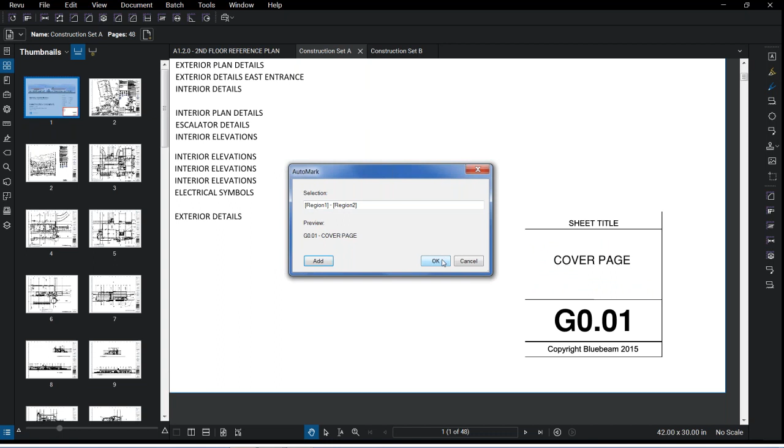Well, with Auto Mark, you'll see Create Page Labels up here. This allows me to essentially just tell Revu what information to look for when naming these sheets, when pulling up my smart labels. So I'm going to grab a page region, and I'm going to add my sheet title in with it, so I want my sheet name as well as my sheet number. I'll give it a little bit of space so I make sure I grab all of these, and then I'll just hit OK.

Now you can have it go through the entire page, the entire document, or you can specify if you want to set it to a certain number. You'll notice that it went through and pulled all of that information within seconds.

So one of the things I've heard about this is, what if I get sheets that are different, like title blocks, and there may be different sizes? That's where we essentially specify what page range. You can go through, hold down Control, select these different sheets, and run your page label there. Run your page labels for the next ones, and keep going. It helps us keep this nice, quick workflow.

So I've got this document all put together for those auto marks, but still, navigating through this document is kind of a pain. It's cool, I can click through my thumbnails, but if I need to see my detail like this one here, I would essentially need to figure out which one was 8.14. So scroll down, find my 8.14 in here, and then click on that. That's cool, but sometimes it honestly takes too much time.

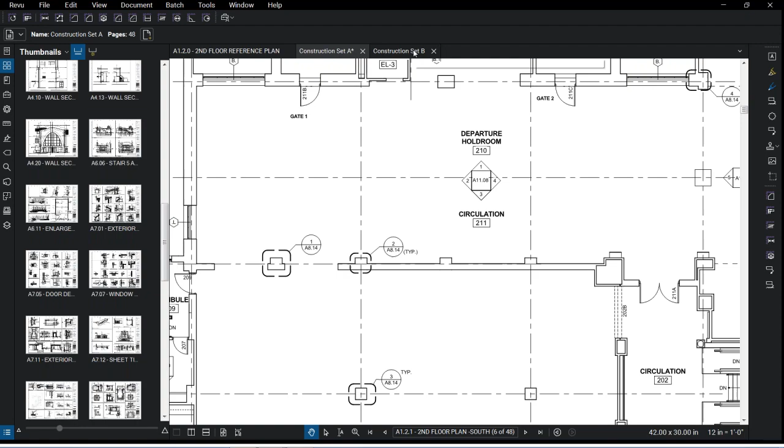So you'll see here I have a Construction Set B. This one is all tied together with what are called hyperlinks. What these hyperlinks are going to do is allow me to navigate through my sheet set easily. So I'll see this detail for my door here, and bam, I'm right in it. So why don't we go ahead and run that here?

Now, I'm going to let you know this feature is an Extreme-only feature, but this is the Batch Link feature. Now, take note here that it says new and open. When I go to create this new, I'm going to add my open files here, and I'll uncheck my first document there.

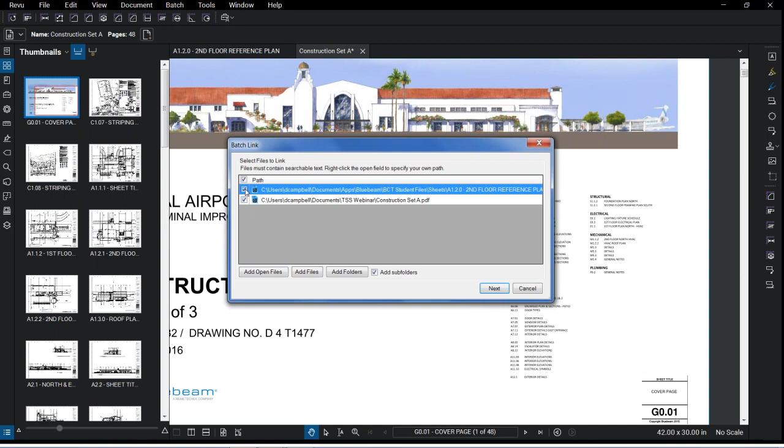But it said open there because you'll see here that we can actually export these settings, which I'm going to show you right here. So I'm going to pull up my page region again, and this time I'll just tell it that I want to look for these sheet numbers. There's my region. Now you're going to see from my scan preview up here, it's going to tell me what it's looking for in these sheets.

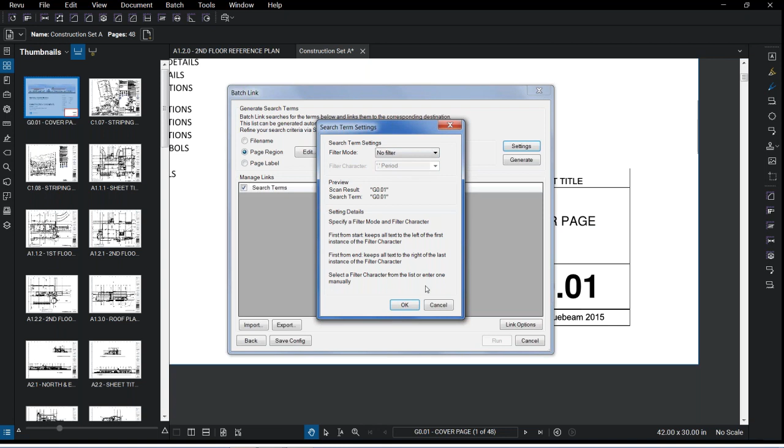Now, if this information kind of changes, like if I don't need to see that G0.01, I just want to see G0, what I can do essentially is apply a filter to this. Maybe I want to see first from start, and I want to see everything before that period there. That period, and there we go, so there's the G0. So we can apply these filters and really drive down to what you're looking for or what you need.

So I'm going to move on to Generate here. You click Generate, and Revu is going to do all the heavy work for me here with adding those hyperlinks. And you'll see I can go ahead, I'm going to get into my link options here.

Now, again, if you are using this quite often, don't be afraid to save this configuration, or export this information. So then next time when I'm ready to go, all I have to do is save it here as Batch Link Typical. There we go. Now when I get ready to run into this again, I go Open, and there it is.

So I'm going to go into link options real quick just to make sure I harp on this. With the include appearance properties, make sure that you guys are using this, okay? If you don't pay attention to this and you uncheck it, you're going to notice you're going to have a fully hyperlinked set, but you're not going to be able to see any of them. So that kind of makes things a little difficult there.

Another one here, case sensitive. All right, so if you guys are running this batch link essentially, and you're not coming up with any of the results, make sure you check for these whole words only and case sensitive here, okay? But I'll go ahead and say okay there and run.

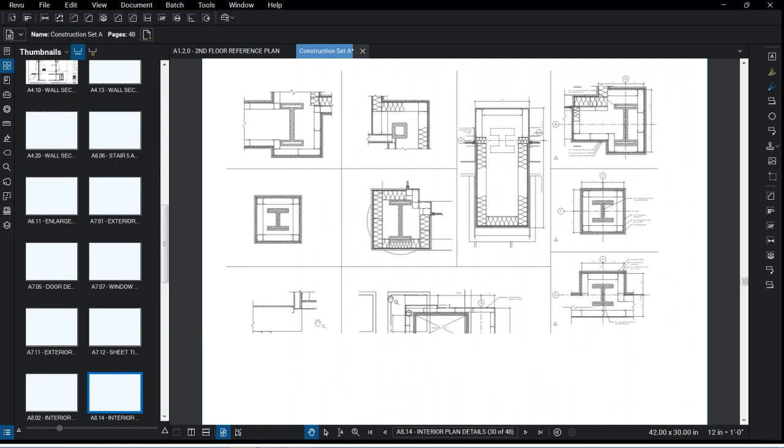Now, you're going to notice this, it's a 48-page sheet set, right? But it's going to tie it together within seconds there for me. 282 hyperlinks were created right there, and this document is all together and good to go. Look at that, right? Get into one of my sheets here. Now this elevation sheet, there's that 8.14 we talked about, and boom. So look at that.

Now this document is essentially ready to go out to my guys in the field or any of my other people that would need to navigate through this. I would go ahead and get this document ready. But let's say my striping guys, my parking guys here aren't really going to need all of these other sheets, right? They just need to see maybe my striping plans here. And I don't need to send them this entire document.

What I can do is stay in my thumbnails tab here, and I'm going to find extract pages, right? So I'll tell it what page range I want. I only want these two. Do I want to delete these pages out of this existing set? Do I want to extract them as separate files? What that's going to do is essentially just break those two apart. If I uncheck this, it's going to just combine them into a new PDF together for me.

But if I check it, you'll notice that I can use that page label that we created over here to name those files. And if I check this option, of course, it will overwrite those existing files that I have saved there. So I am going to uncheck that. I'm going to leave open files after extraction. And since I did batch link this all together, I want to update those hyperlinks to relative paths. That way, if I need to save it somewhere else, those hyperlinks will still jive for me.

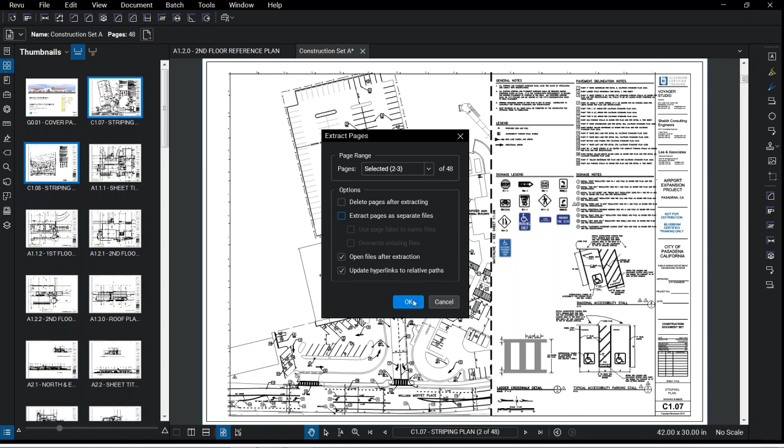So I'll say OK. I'm going to save it to my disk here, and I'm going to call this my striping plan. All right, check it out. There we are. So we're good to go there.

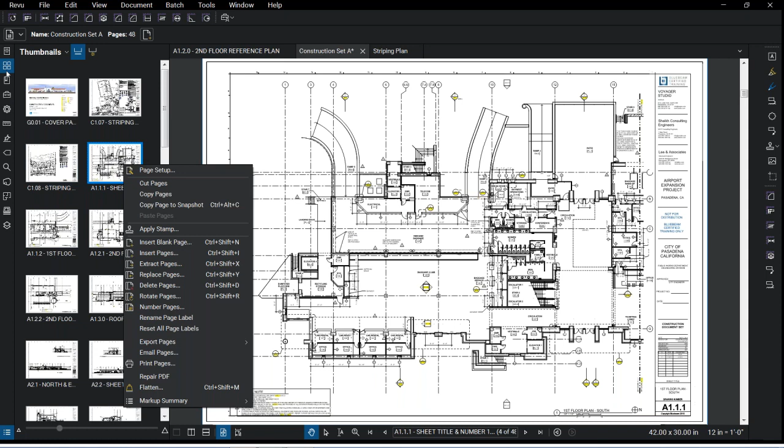Now, if I make any updates into my construction set or on my striping plan, if I made some markups or noticed there were some design changes, let's say I got a new sheet here for my A101 or 1.1.1. Again, I'm staying right in this thumbnails tab, and you'll see replace pages, okay? So this is what I'm going to use if I'm trying to bring in different revisions. So I have my revision here, open, replace that page, and voila, right?

It's there. The only problem with that is that you're not keeping the old sheet within your sets. You're essentially not really tracking that revision. Yes, it's there. Yes, we know it's the revision, but I just lost that sheet inside of here. Now, yes, I could insert that page. That's a potential one. But if I want to do this a little smarter and easier, especially if I have multiple sheets, you'll notice replace pages really only allows me to bring in one at a time.

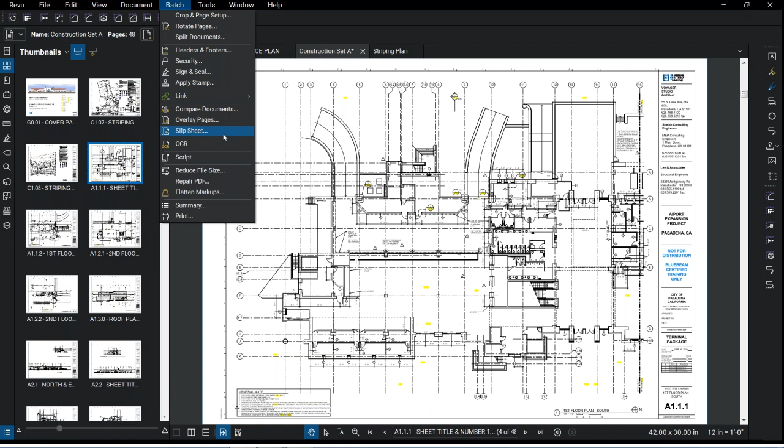But if I go up to batch here, and again, this is an eXtreme-only feature, I see slip sheet. So slip sheeting is going to allow me to add multiple files in here and slip sheet all of the revisions at one time. So maybe I go ahead and get into a folder here, stand projects, okay.

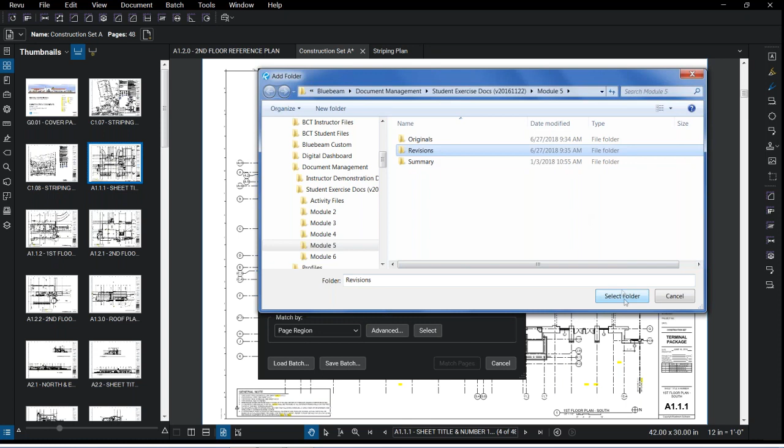I'll go, oh, get back into here, there we go. There's the right folder. All right, so I find my originals and bring that whole folder in. There we go. And then I'll go ahead and grab my revisions here. Cool. All right.

And then I essentially have to tell it, how do I want to match these sheets together? Do I want to use a file name, the page index, the page label, or a page region? Page region essentially is going to be like that auto marking. I've got to tell it where to look. So what I can do here is hit select. It's going to open up one of those documents for me. I just tell it where to look. Okay. And I match pages, right? There we go.

Now, here's the awesome kind of options here. Do I want to insert these revised pages before my current pages, or do I want to replace these with the revised pages? So I want to keep these in here so I can see kind of what's going on. I'm going to copy my markups from my current pages to the revised pages. That way I'm not losing some of my data there. And any markups that you have flattened, you can specify to unflatten them, or flatten them after you do that copy. And then, do you want to stamp your current pages with superseded?

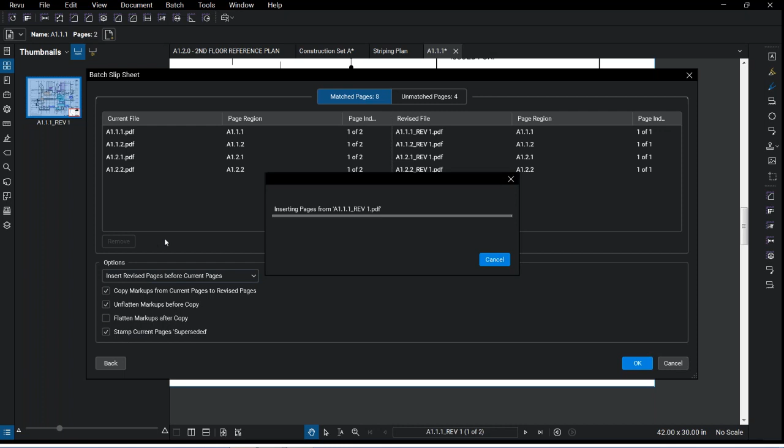Okay, so if I say okay here we go. So it's bringing all these pages together. And the great thing about this is I have an opportunity to create a detailed report on what I just did. And this is a CSV or PDF, right? And of course, coming into my settings here, do I want to create hyperlinks back to those documents? And then do I want to include those column headers? So I'm going to say yes and yes. I'll leave that alone for now, put that right on my desktop and say okay.

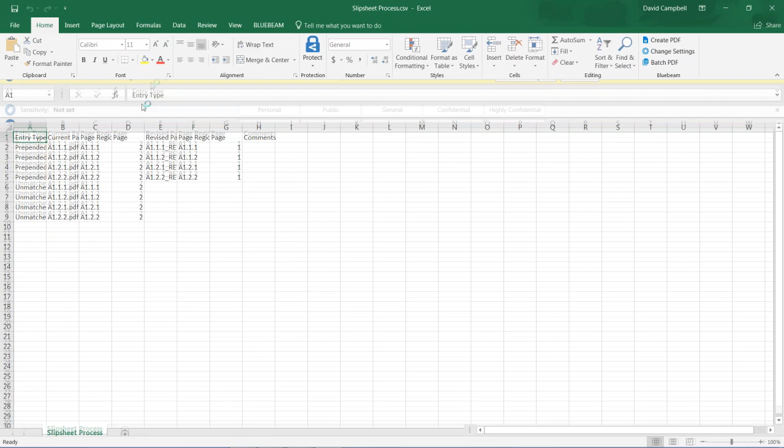And guess what? It's going to open up right into Excel for us, right? So now we have this nice trackable document here. Okay. And you'll notice as soon as I hover over these, there it is. They're hyperlinked, and it'll take me right to that document. Cool, right? I told you. A lot of this stuff today, man. It's awesome. Awesome stuff.

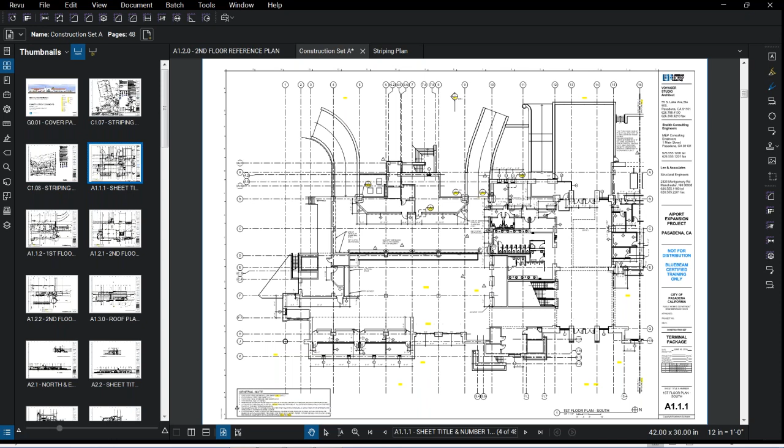So, what next? I think we're going to go right over here. Now, I know I'm kind of flying through this stuff, guys. Again, I really enjoy myself in this program. Sometimes I get a little quick. If you guys have questions, make sure you're posting those up. And Paul can stop, we can slow this guy down. Yeah, they can slow me down at any point, you know, kind of get into something if I need to.

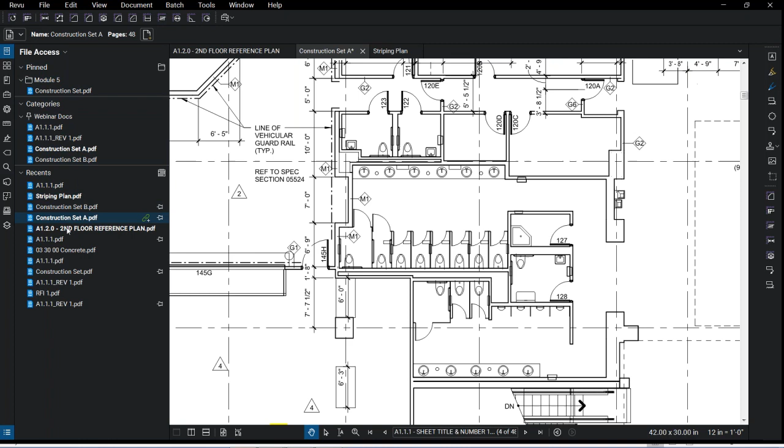All right. So up next here, one of the best, well, all of these features are awesome, I'm going to tell you that right now. But one of the best features in here is you'll see right over here this little magnifying glass. This is for search. So typically, yes, I can search through. Let me get into my recent files here. I've pinned up some of the documents that I'm going to use today, so it allows me easy access to those documents, right? But let's get into search here.

And let's say I want to search for forms in my spec sheet here, okay? I say forms. You'll see really quick, it's going to knock these out and tell me how many instances I have inside of this document, which is cool. I can hyperlink all of these, mark them for redaction, apply a count measurement, highlight, underline, squiggly, and strikethrough. But you know what? Let's take it a step further.

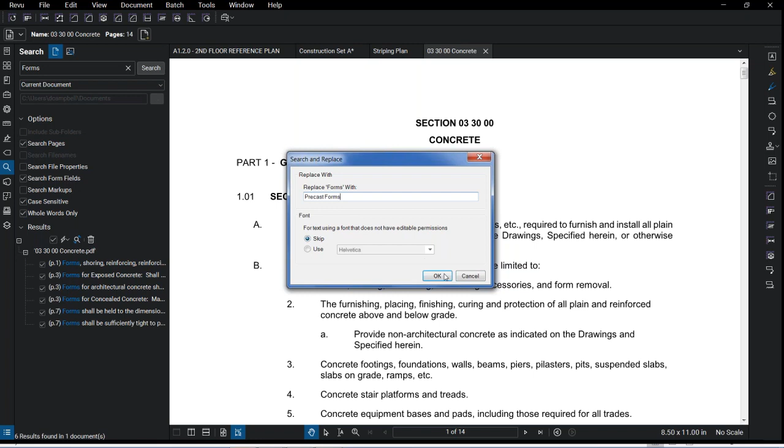Maybe I want to replace that word forms, right? So what we want to do here is I'm going to change this to precast. You know what? Let's do precast forms. And say okay, check that out, right? Look at that. So there's no distortion of my text. None of my text is overlapping there. Everything is kind of moved around for me.

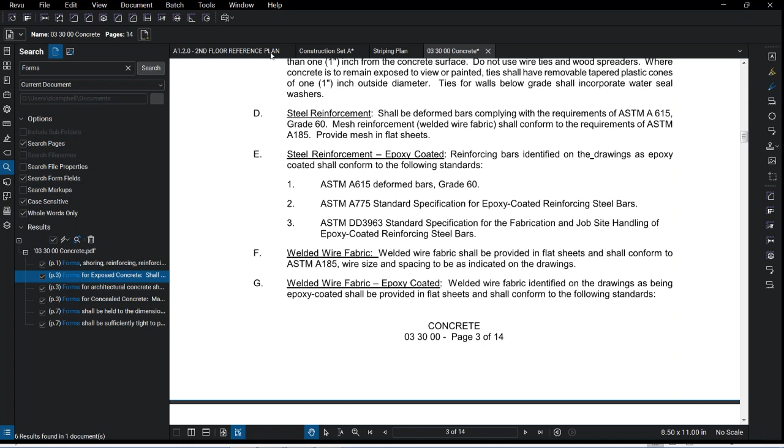Again, if I click on these, I should be able to find them in here as well. It's just quick. So if you need a quick change, you can make those within the document pretty quickly. Okay, cancel. I'll just come back over into here. All right, so maybe I won't use that one.

All right. So on the other side of this, though, not too many people pay attention to this one, the visual search. So we can do a visual search on our sheets. Let's say you're trying to find how many times a valve is being used, or how many water closets we have on this site. What I can do, again, I can search just this current document, or an entire folder at one time. So if you have your project all saved together, you can go ahead and knock that out for your project. Now I'm going to get in here and I'm going to hit get rectangle real quick.

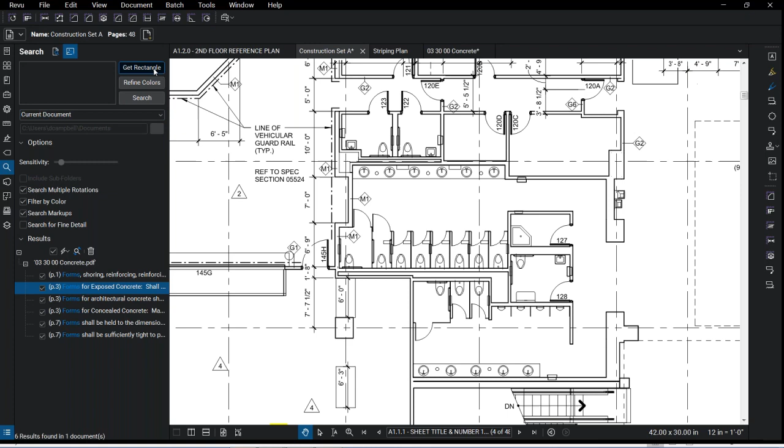Got to tell it what to look for. All right, here we go. I'm going to draw it right around one of my water closets here. I don't like that one. I'm going to try another one over here. That one's missing some lines. Nope. I'm going to take my sensitivity up. There we go. And we're going to hit search. We're going to see what we can find here.

All right, so while this is running here, notice this sensitivity bar. You adjust that sensitivity bar to help you get a few more results. If you go too high with the sensitivity, you're not going to get that many results. You go lower on the sensitivity, sometimes you get some random lines, things like that. But what's great about it is you just go back, adjust that sensitivity, and fine-tune it to where it's pulling up all of them or almost all of them. And I'll show you a quick tip and trick on figuring out which ones it missed.

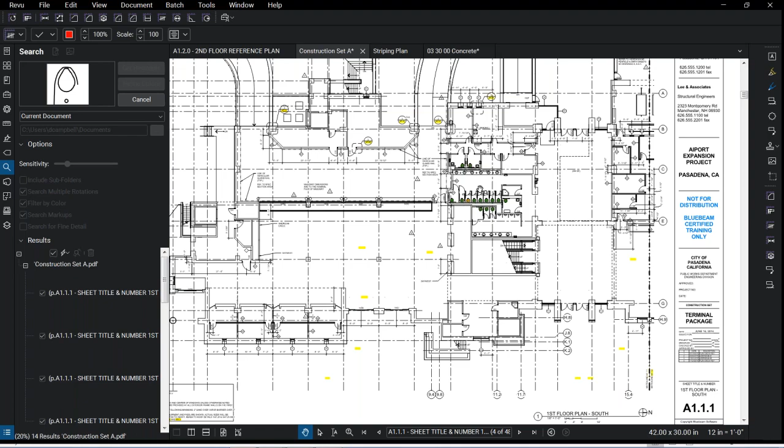Underneath my check options, the interest here would be applying a count measurement to the checked options. Typically I would build a custom one utilizing water closets and things like that, but I'll just use the regular default here. All right, there we go. And if I get into my properties, it's giving me a count of 14 there. Now, we know that it might have missed a couple. So we look around, and actually, no, looks like it picked them all up for me. Awesome. But let's say I need to add to this count.

What I can do is right-click on my count, and right here you're going to see resume count. So if it did happen to miss any, I could just go through and check on those other options. And when I hit escape to back out of it, maybe I'll show it in my markups list as well, it's going to show the updated number there for you. Okay. So there's my count.

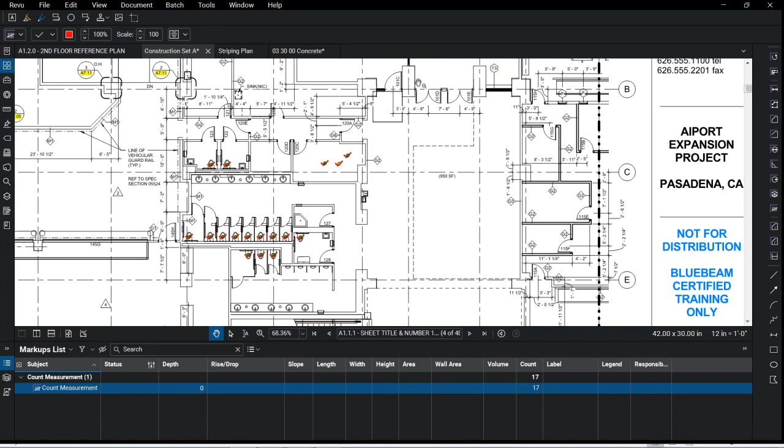And what's awesome about this as well is when you get down into that markups list, you've got that count going. Now we could switch over to that other profile, my quantity takeoff profile. I've got some takeoff and estimation columns built out inside of here where I can do a quick estimate or takeoff for my job on those fixtures. So very, very fantastic tool there.

I can't even, yeah. All right, yes ma'am. Do you want to ask that question in case other people have it? We'll get a little bit of clarification. Okay. All right. So let me get back into this one.

Now, notice under pinned here, I've got this module 5 document. If I click on this folder, notice that it brings up the entire folder for me and gives me access to all of those documents. That's a pretty nice feature if you have your project documents hosted in one folder and you need quick access to those. Or maybe some typical RFIs, submittals, or any type of forms that you typically work with. You can essentially pin and save it to your interface here.

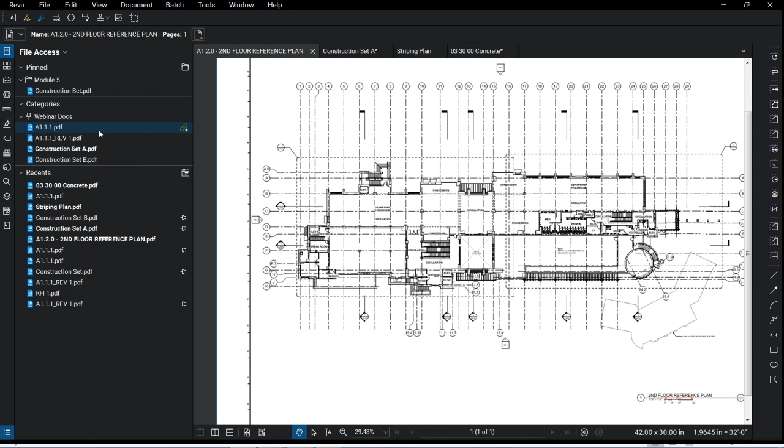I'm going to open up this A1.1 here. You know what? I'm also going to close all of these other tabs here real quick. If you didn't know about that, you can right click over here and you'll find close other tabs. That'll clean those up for you real quick. Oh, no, close out of it. There we go. All right. So I have my A1.1 and my revision.

Now, sometimes, like on here, it's kind of hard to tell what they might have done if there's no clouding or no revision cloud, something they've tagged letting us know what they've done. So in Revu, we can find within our document tools up here, compare and overlay. Compare is great, and so is overlay. But what compare is going to do is essentially cloud all of the differences or revisions between our two documents. So I'm going to make sure, there's my original, and here's my Rev 1. Cool.

Now, mine are going to line up perfectly. I know I printed these PDFs off here, but if somebody doesn't print to 100% zoom, they print off scale, something like that, different size title blocks, you can still utilize this compare or overlay with the manual alignment here on select window or pick points. So that feature is definitely there.

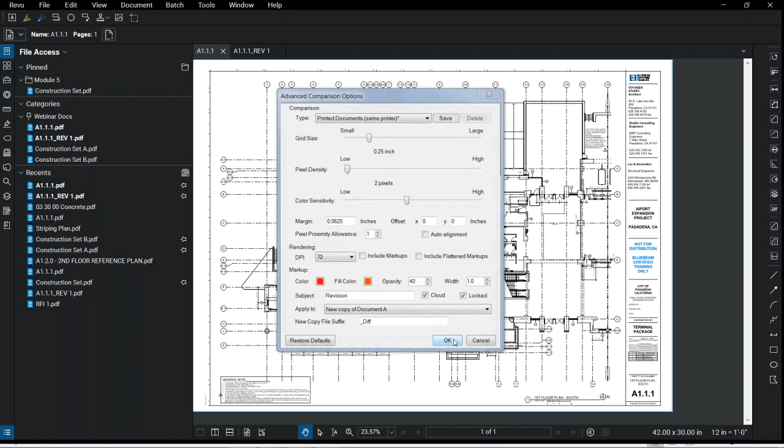But right down here, it's going to create that new copy of document A and put all of our clouded differences on that doc, and it's going to name that document with this file suffix, diff, okay? I say okay, and I let it do its thing.

So here's my diff document here, and you know what? I'm going to make sure, which I do, I have my sync on so I can scroll through these documents at the same time, seeing what's going on. Obviously, there's a build out there that we didn't have in our original. And that one looks like just the line type changed. But it's crazy how it can actually get into that. It searches down into this PDF content and will tell you everything that has changed here. So it's a pretty fantastic feature.

Yes, sir. Matt is asking, how do you toggle the sync? Oh, how do you toggle the sync? That's a great question. So you click up in your View tab, and you're going to see Synchronize Document or Synchronize Page. So we can choose to synchronize the entire document or one page at a time.

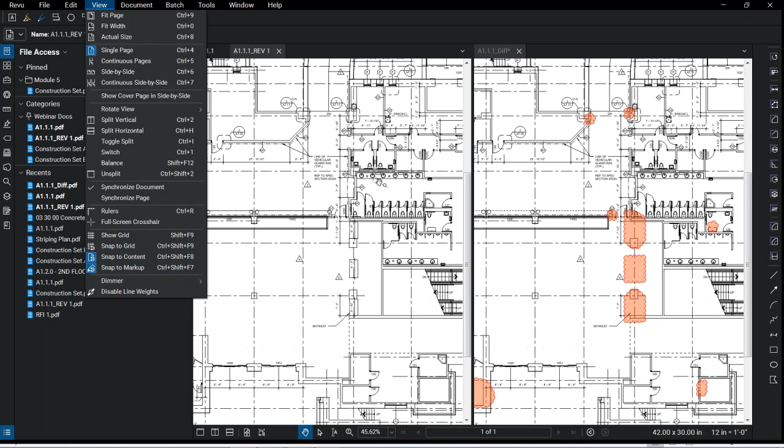Okay. And that's a very, very awesome feature, especially if you guys are looking at split screens like this. Or if you didn't run compare, just to get a quick overview of what's going on, you can use this split vertical here and kind of go around, and using that sync feature, it'll give you a quick way to kind of go around and see what's going on.

Now, I wanted to run that one again here real quick and show you this select window here. So pick point, select window, that is for a manual alignment. But let's say, you know what, I know there's a change on this document here, and it's a big change and affects me, and I want to concentrate on this area. I would use that select window and then say okay, and just put those in the same place as my first document. And there we go. It'll cloud the differences of just that area, okay?

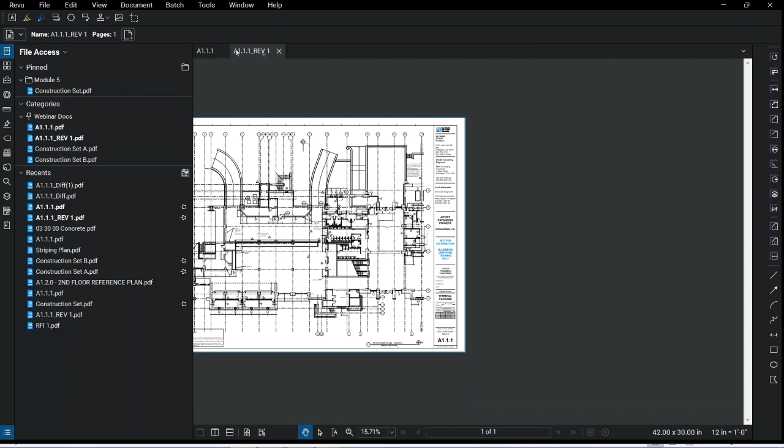All right. Yep. When you have a moment. Yes, sir. We got a lot of questions regarding what version of Revu you're working with, and also why the tabs might not align with the default settings, different profiles. Okay, got you. So I am using the 2018 Extreme Edition. 2018.3 is the most recent update that I'm using.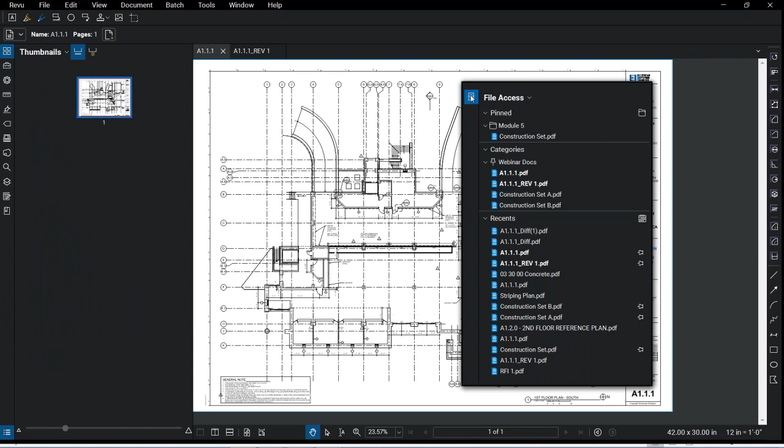Some of the tabs, things like that, you may be noticing might not be in the same locations. All of these tabs, and your interface, are completely customizable. So if I wanted to bring my file access, I can allow it to float. So I do have that capability for multi-monitor support there, or drag it over so I can utilize both of my panels like you would in 17. But I don't have to with 18 here. I can just utilize this one side so I can maximize my screen real estate.

But also, all of your options as far as your toolbars here, your toolbars down here, the placement of your tabs, what tabs you have shown, as well as some of these columns in our markups list, a lot of this is placed the way it is because of your profile. As I change to maybe field issues here, it's going to change quite a bit as far as my toolbars, the placement of my tabs, that markups list, as well as the tool chest and the tool sets available there.

So if I get back into my review profile, those are completely customizable, they are exportable, so if you guys did want to standardize the way that your interfaces are laid out, you can utilize those profiles. They are a very fantastic tool here in Revu.

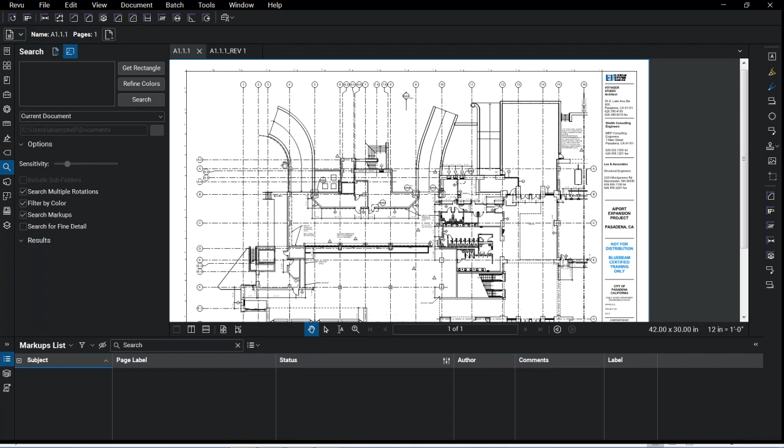Good. All right, cool. So moving on, we're going to go right into that overlay. I spoke about this one briefly. Now, check this out. Two documents here, right? But I have the capability to keep adding. So I can continue adding revisions of documents for overlay pages, whereas with compare, I can only run two documents at a time. Not two pages, two documents, okay?

So with the overlay pages, you guys are going to see the colors here. Overlay is essentially like placing your documents on top of each other over a light table. So if you've ever done that, you'll notice that it's going to assign each one of these documents a colored layer. And then we should be able to see the changes based off of that.

So again, if you don't have that matching title block or the zoom, the scale, you can manually align your points here. But I'm going to say OK. All right. And it's going to knock it out for us. So look at that. Just look at it. It's all laid out there. See all of our dimensions, all of our changes.

Fantastic, and quick, right? And again, we have that separate document there to go ahead and save, so we can track all of our different revisions that are happening within our jobs.

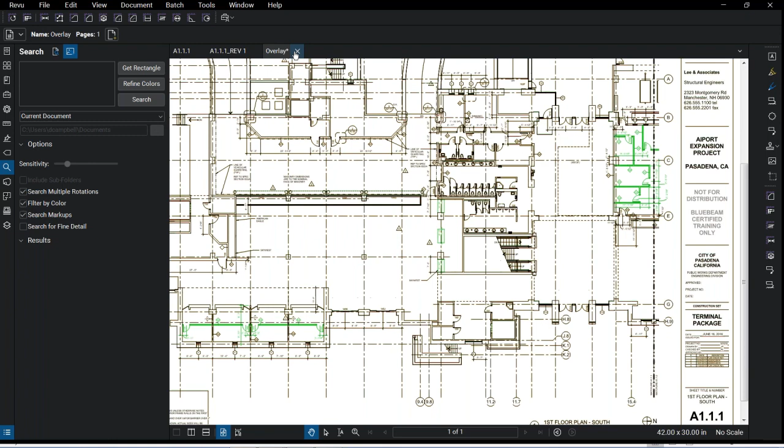Overlay and compare, fantastic tools, right? But you're a little limited when you go to do that compare documents, since we can only do two documents at a time. If you wanted to increase that, we're again looking at the Extreme version here, but we're looking at batch compare and overlay.

With batch compare, I can bring in multiple files at one time and slip in those revised files. So let's go with a folder. Sweet, all right.

You know what, I went to the wrong file location again. All right, there's all those. Oh, I just need to click on it and say OK. Too much clicking. All right, there we go.

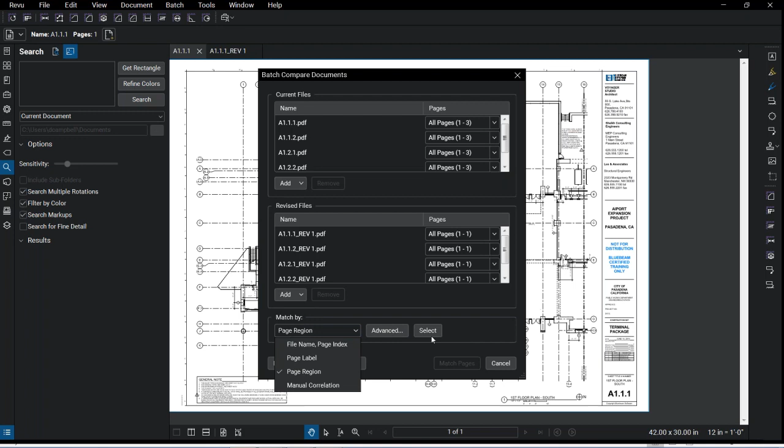And again, you can do that whole page region, matching them by things like that. I'd hit select there and essentially tell it, all right, where are we looking? There we go, A1.1.1 there, and go ahead and match my pages.

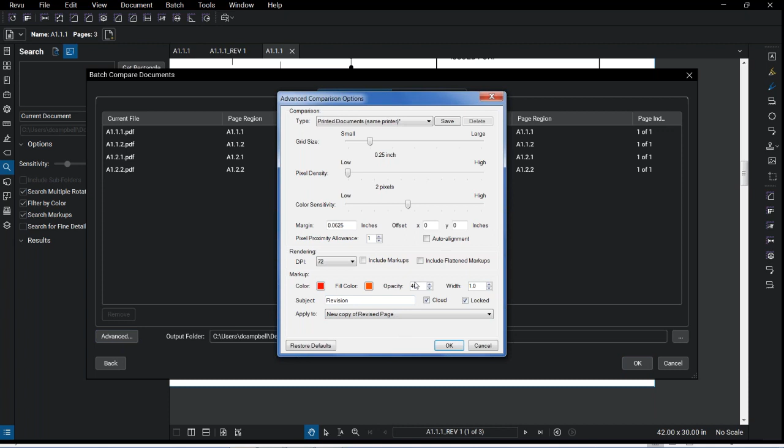All right, so here we go. It's bringing it out. I do have some advanced options again because I am doing that document comparison as to what I want to do with those markups. Do I want to make them red, adjust that opacity, all that kind of stuff? And I'm just going to go ahead and say, let's do it.

All right, takes a couple seconds here, but we're spinning up. Awesome, there we go. Now, again, we do have that, and we're not going to name this one slip sheet. This time I'm going to put this into PDF. We went into CSV last time, so let's see what a PDF looks like.

And then again, with our settings, if you're creating a PDF, we can create hyperlinks, go ahead and date timestamp on there, specify what page size you want to do this at, right? Say OK, and now we're going to get a little printout here.

And I can again click through this and see exactly what was changed in terms of my compare docs. Okay, see my A1.1.1 there, everything like that. So we're good to go.

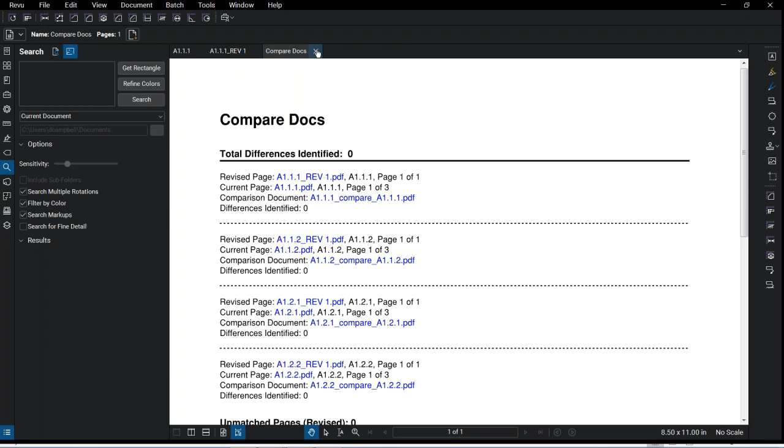All right, so again, some fantastic features there, fantastic, right? And they make document management quite a bit easier. Now there are a lot more features. I could honestly go on with you guys with this probably for the rest of the day, but we're going to go ahead and switch gears here.

I've got Sean asking, does the page search for titles only work on exported PDF documents or scanned as well?

Okay, so for a scanned document, you need to utilize Bluebeam's OCR feature, the optical character recognition. Revu works with vector graphics. A lot of times when you're printing out of like Adobe or Revu, they're going to be searchable, if we're printing them from Revu, PDF, things like that. But if you're scanning these documents, they default to those raster graphics, so we need a way to convert those to make them searchable. That's what the OCR function does for us.

Now, before I go on from that, the OCR is a Bluebeam Extreme version only feature. But we do also have the batch OCR, which is functionality for if you have a lot of scanned documents or multiple documents and want to run that OCR all at one time, you can.

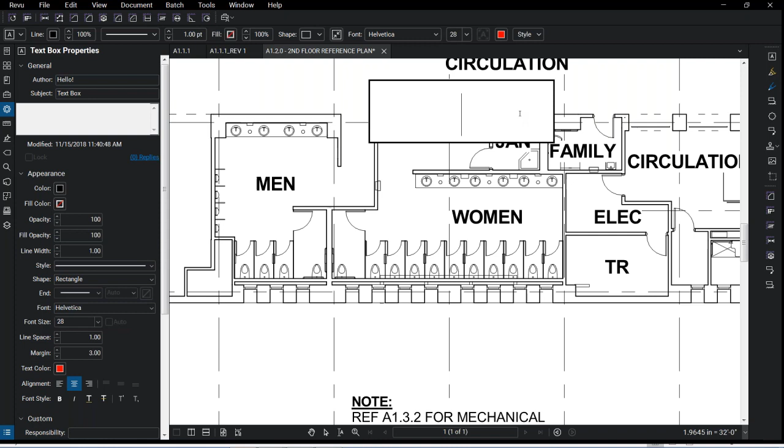So something with my text box here, it's nice, it's quick. I'll get into my properties, and I can adjust or utilize any of the different properties here. And then I can adjust my text box as far as, I need to change my text color there, and I'm going to drop it down in size to a more manageable one. But now that I've changed my text, my box around it is huge, so let's go ahead and auto size that thing real quick.

Yep, I just did that. See, right click, auto size. All right, that's cool, that just happened, and it was so quick. So back up to our tools, that text box is pretty fantastic.

You're going to see that we can change our line styles. You can change that shape, so if you want to utilize a circle or a triangle, maybe marking up or noting your revisions, you can utilize that option there. We're not going to look at the custom one. But if I know I'm going to utilize this over and over again, down in my options I can go ahead and set this to my tool chest, or if you know your text box is never going to change, you don't need to adjust these properties every single time, you just set it as your default right down here.

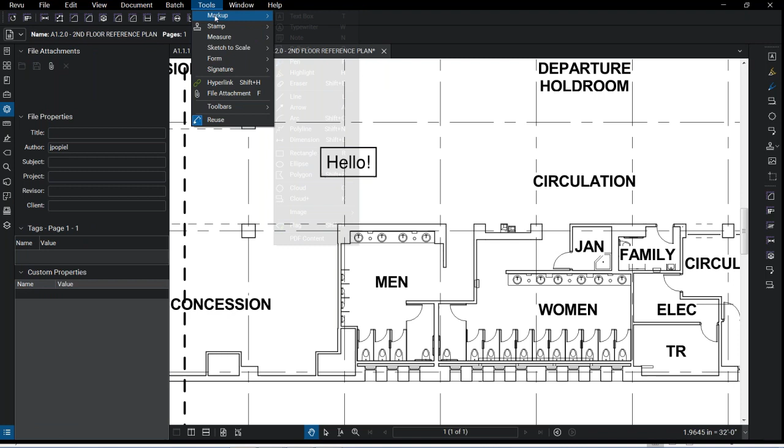Okay, so back up to these markups. Here's my callout, it's essentially a text box with a leader already attached to it. What I can do here is maybe, okay, see spec sheet, and then attach my spec sheet to this markup essentially.

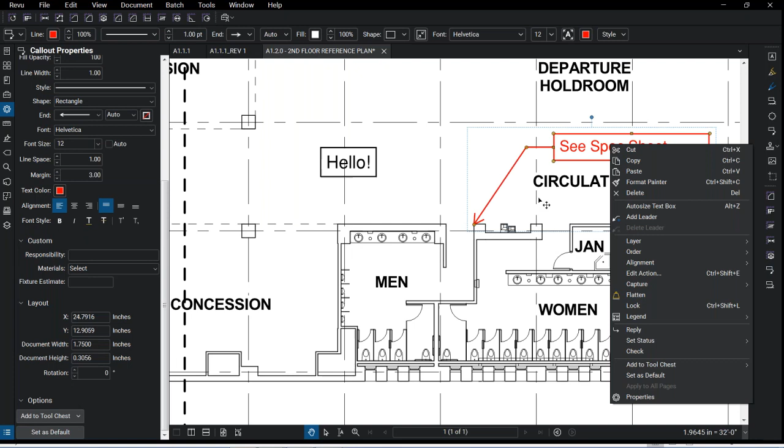Or maybe I wanted to go ahead and find another one down here, and this time I'm going to utilize my Cloud Plus. So the Cloud Plus is going to be one of the most frequently used here, and you'll see that it's a revision cloud with a callout or text box attached to it.

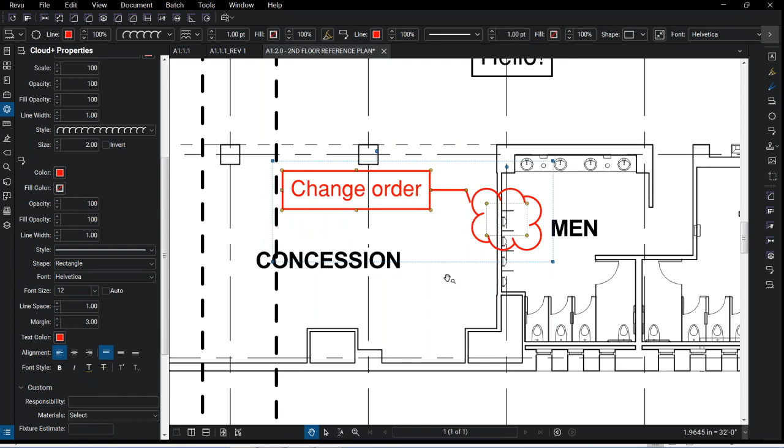Okay, so maybe we have a change somewhere with that urinal there. I can go again and auto size that text box, and I notice my rectangle isn't coming around. So when you notice that you place your text box, any Cloud Pluses, and you're not seeing those rectangles, make sure you're checking out your line width here. As soon as we adjust that line width, it's going to snap for us. Or a quick way to do it is to just click on rectangle, bring it up, and click it again. Now I don't like how this one's adjusting for me, so I'm going to go ahead and auto size that again, get it to snap for me.

Now, with these markups, there's quite a bit of additional functionality we have. So maybe again, I have my guy walking in the field checking out my building, and he says there's a huge crack in this wall. We need to fix that, okay? But he needs to make sure the people in the office understand what's going on here, so I'm going to go ahead and just utilize that right there for you.

There we go, and auto size. Okay, but he needs to go ahead and let people in the office, or anyone who's going to read this PDF after this, get an idea of what's going on. So you notice I can right click on that markup there, and I'm going to go to capture.

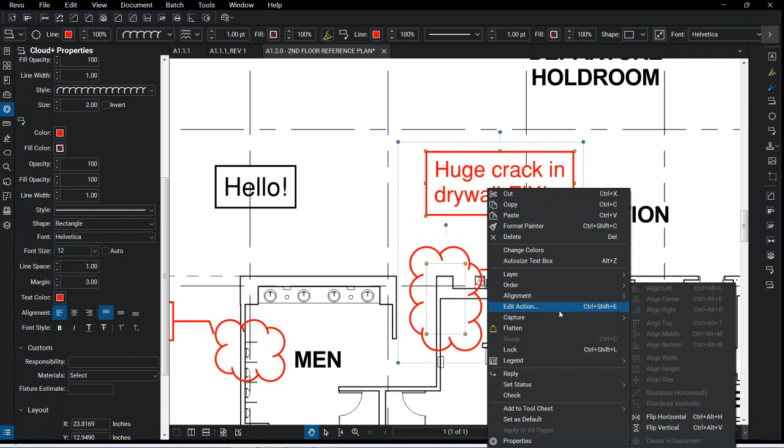The awesome thing about this is if your device has a camera on it, like an iPad, Surface Pro, or Chromebook, you can take pictures right from the field and attach them to your markups. Or if you're doing it back at the office like I am here, you can get into one of your folders and find your images.

Here's my wall cracks. I'm going to bring up both of those. I'll click on my little image there, and there we go. Check it out, right? Awesome. And it's attached right to that markup.

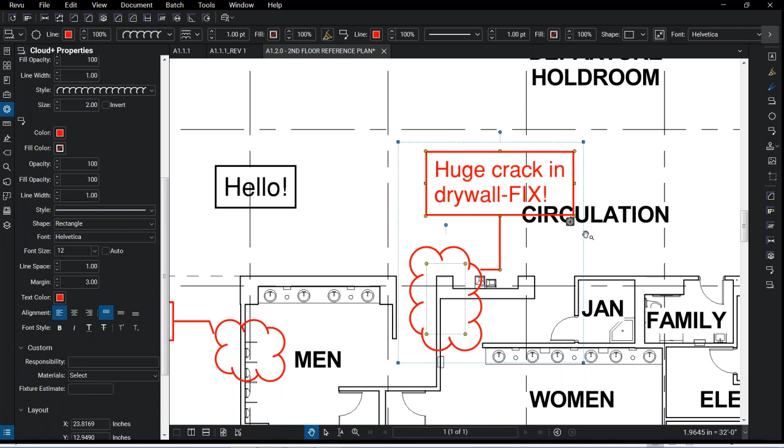Now, what version do you need in the field for that? You just need the standard version to be able to do that. Any version of Revu will attach pictures to those. Oh, and also, before I move on, it's pictures, 360-degree photos, as well as videos that you can host with those markups.

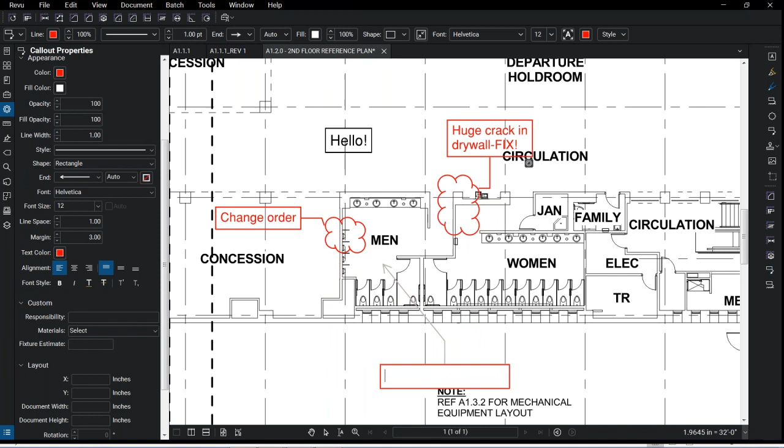So essentially, let's use a callout for this one, and say I want to go ahead and refer this to A3.2. What I can do is set up a hyperlink so that when somebody clicks on this, it takes them right to that sheet. So I right click on that, and you'll see edit action.

Anyone who has worked with hyperlinks before knows this is essentially our hyperlink dialog box. I'm getting ready to tell it where I want to go—do I want to jump to a specific portion, maybe a different document, or a specific page within my current document? Or do I want to create what's called a place?

A place will allow me to refer to a specific portion, like my men's room or electric room, things like that. And I can utilize this hyperlink to refer back to that place multiple times within my document.

A space is another tool over here in our tabs that gives us the ability to track information going on in those spaces. So I can track all the markups. If I'm doing my punch walk, I can place a space for each one of my rooms and track all the punches or markups going on within that one space.

And on a note there, if you're printing from Revit, you do have the CAD version of Bluebeam Revu. If your people are printing from Revit, utilize that Bluebeam add-in to create your spaces automatically from your rooms. That just makes sense—you can carry all that information in, and it's all there for you. Those add-ins, for Microsoft Office, CAD, and Revit, that come with the Bluebeam CAD version, are awesome and save you a lot of time.

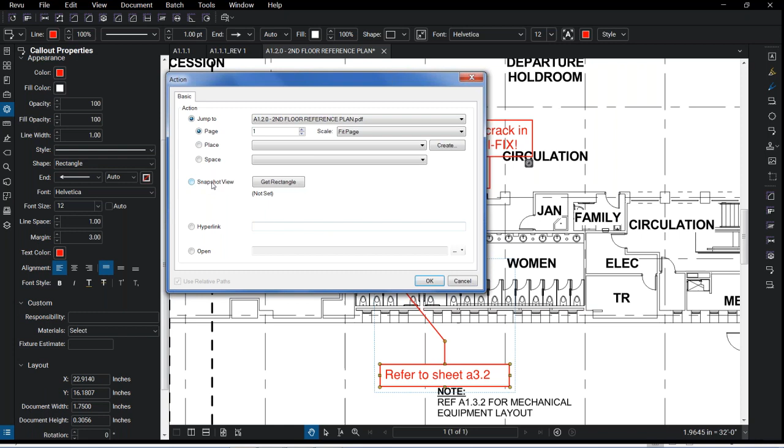So heading back into this, you'll see we got the snapshot view. Snapshot view is if I want to snap right to a specific portion of a sheet, any type of sheet. So I'll utilize that one to show how it works real quick—you're going to see it snap right to that location. Now, obviously, it's not beneficial here for me, so I'll go back in and edit that action.

What I can do again is hyperlink here—this is going to take me to a website, a web address. And then open is if I need to open up a change order, attach that change order, an RFI, submittal, or a form, anything like that, to these markups. It's going to populate with that little hyperlink symbol down there, and your user could click on that hyperlink you've made, and it would open up that document for them in another tab.

Okay. Now, there are so many different markups in here too, guys. I could go on all day about those. Even the line tool, the ability to create your custom line styles or custom line types. If I did want to go ahead and create maybe a roadway or maybe a hot water line or a solid sewer septic line, anything like that. Or you know what, I'm just tracing conduit around my plan, or any piping, things like that. Underground lines, anything like that. We can create our own custom line styles here, which is a fantastic tool as well.

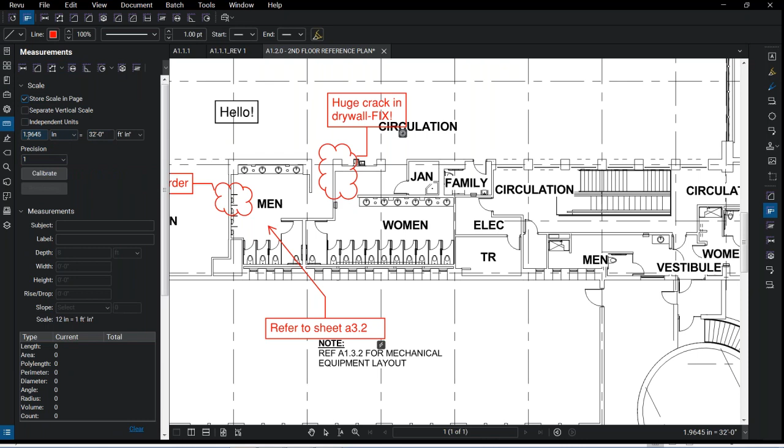So if you guys have any questions on that, be sure to ask us later. But I'm going to go ahead and move on to the measure tools, right? So the measure tools, again, these are fantastic. You will have to calibrate your drawing first. Always calibrate your drawing. And I'm just going to be honest with you guys, I will not utilize the typing in of the scale here, because when you go to type in your scale, you're gonna be a little off. I will always recommend to try and find a known dimension, 2 points with a known dimension on your sheet, and then go ahead and grab that.

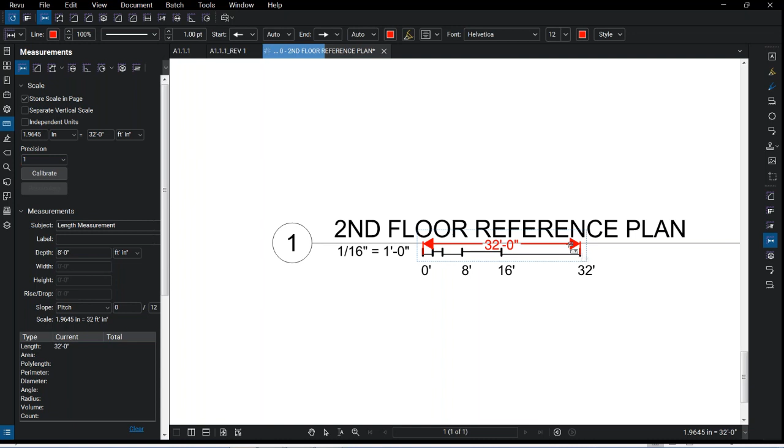So I've already stored my scale in this page. It remembers it, right? I do this once, I calibrate it, I save it, it's there. I don't have to do it again. And then if my scale is the same on all those other pages, I can just apply it quickly and then go through. So just to double check here, I've already got a length measurement on there, but we can just run another quick one here. And make sure you're utilizing your shift key when you guys are doing this. It's going to hold that measurement straight for you, okay? I know sometimes it's hard to snap to those, and you can get off a couple inches typically if it angles on you.

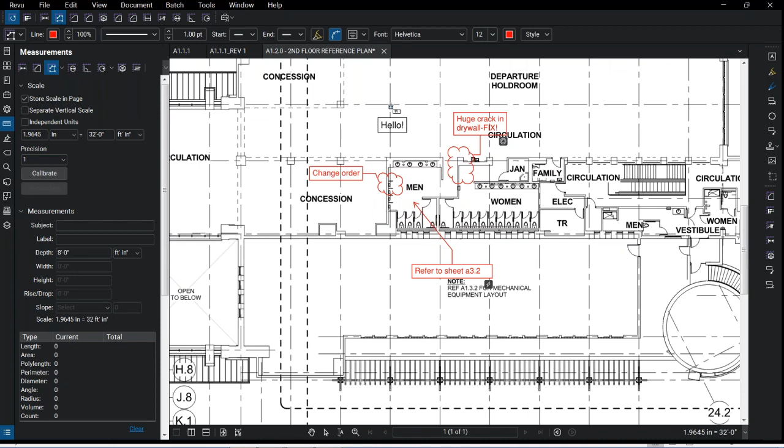So the ones I was going to concentrate on, I showed you that length measurement down there. It was very nice. Your poly length. So this one here is great if you're trying to trace or follow any type of conduit, piping, underground wiring, anything like that, right? So what we'll see is that I just click here, I'm clicking, I'm drawing around, okay? I will double click to end it. So check it out. All of my individual segments are broken out for me, giving me those distances or lengths, and I have the overall here.

But wait, there's more. So we get down into our markups list down here, right? And I don't have this one populated yet, so I'm going to go ahead and get into my columns here. I'm going to get rid of a couple of these other ones because I really want to get to this rise and drop there, because that's where this poly length measurement stands out. So you'll notice now it's saying 0, but what I want to do is apply a 1 foot rise. There we go. 1 foot rise over the course of my entire line. Check it out. It incorporates it in and recalculates for me automatically.

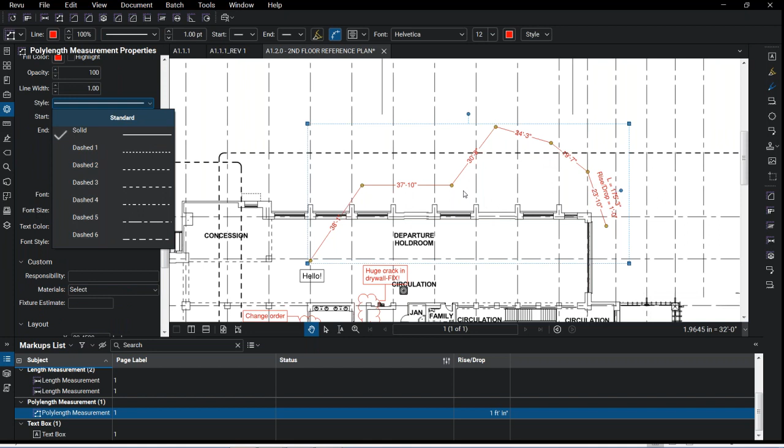So if I know I have a floor to floor height or ceiling to floor height, whatever, of 1 foot, you can adjust it there. We also do have a slope function, but the rise and drop here is going to work explicitly with that poly length tool. And also, let me find my settings here. We do have a few different basic line styles here to utilize with that poly length tool. All right, area, man, area is where it's at if you're trying to get your square footages, right?

So another big thing here is that you guys are going to notice that my cursor is snapping right to portions of my wall, right? As detailed as you get inside of Revit or something like that, you have your individual layers. This will snap to those layers. If yours isn't snapping, make sure that you guys are on View here. You want to make sure you're utilizing that snap to content and snap to markup, okay? And if that's not making you feel all nice and fuzzy, here we go. We got a show grid, okay?

You can utilize that grid pattern there, and we can get into our preferences to adjust that. Let me get into my grid and snap here, general grid snap, and here's where I can adjust my grid spacing, right? And then there's all my snaps as well, so I can turn those on and off. Oh, snap. I did that. All right, so I'm going to go ahead and get rid of that show grid there, all right?

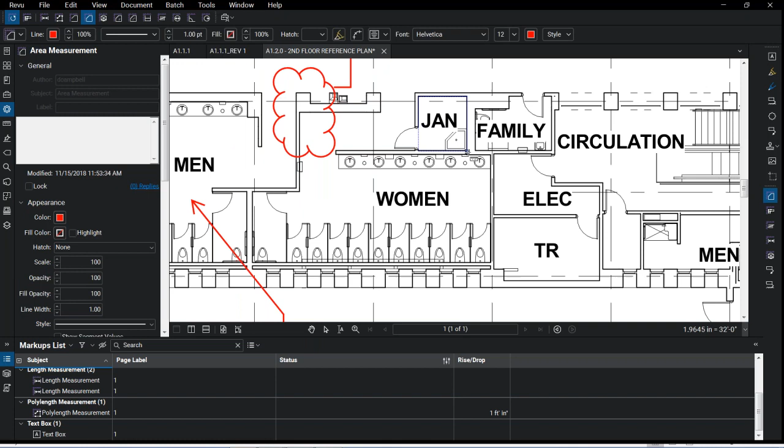But with that area tool, there we go, area, and I'm going to do just a quick one here. It's kind of cheating, I know. I'm going to grab this janitor's room, check it out, 36 square feet, right? All right. Now, also another thing that's nice about these area tools here, I can drive right around, picking my points. Oh, you know what? I'm going to leave that one. I'll come back and just adjust that control point afterwards. It didn't snap to where I wanted it. That's fine. We'll come over there, there we go. And boom goes the dynamite.

So we know this one here is off. I can go ahead, drag it up and over. And I'm going to utilize my shift function here to drag that text back down to where I can see it, right? But let's say I'm utilizing a bunch of different materials on my job, and I want to make sure that this looks like 4-inch ceramic tile. So I'm going to put my hatch pattern in there, maybe drop my scale down a little bit.

And you know what? Maybe I don't want red. Change it to a green there. I'm going to drag it out there a little bit. There we go. All right, now we can see it a little bit better. Okay, now the great thing about this is, if I'm trying to track this as a specific material, I'm going to change this subject here, get rid of that area measurement, and I'm going to call this flooring, right? Maybe apply my label that's going to be 4-inch ceramic tile.

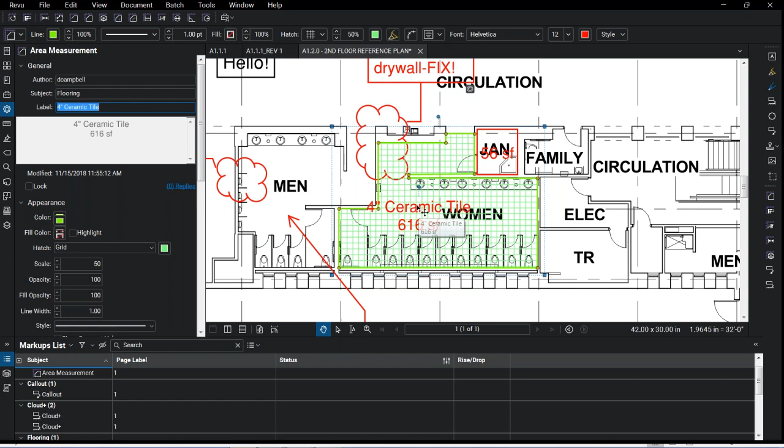Cool. But what's really cool about this, if I sort by my subject here, when I find my measurement, right? Here's my area measurement. There we go. Check it out. Oh, it's getting kind of hard to see there. Bring this up a little bit more. Oh, I seem to have placed my markups list up there. All right, we'll drag it back down. There we go. So you're going to see that it's now tracking this as flooring, right?

Again, area measurement, flooring. So when I do a filter here and I say I just want to see all of my flooring on my plan, there we go, right there. Or I can do a search, all that kind of stuff. It's customizing those markups, right? Utilizing that subject column is huge for finding the information later. But I don't want to have to remake this tool every single time. I'd like to be able to just keep reusing it.

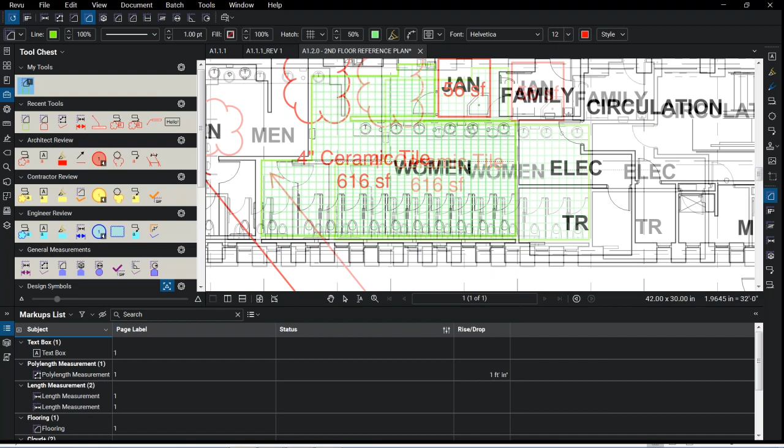So what I can do, right click, add to my tool chest, right? And there we go, voila. I'm going to change this back over to my area tool so I can go into my men's room and grab this flooring. Yes, sir. There's a couple questions for the hatch. All right.

First off, can you mask the text over a hatch? Yes. So you can mask or apply a fill color over your hatch so it does stick out better. I know mine's a little hard to see there. So we can do something like this here, get into your properties. I can also apply that fill color around the outskirts of my markup there. But what we'll see is, okay, let me find my fill color. Highlight, okay, something like that. But now my hatch is kind of off. There we go. Now we're getting a little bit better.

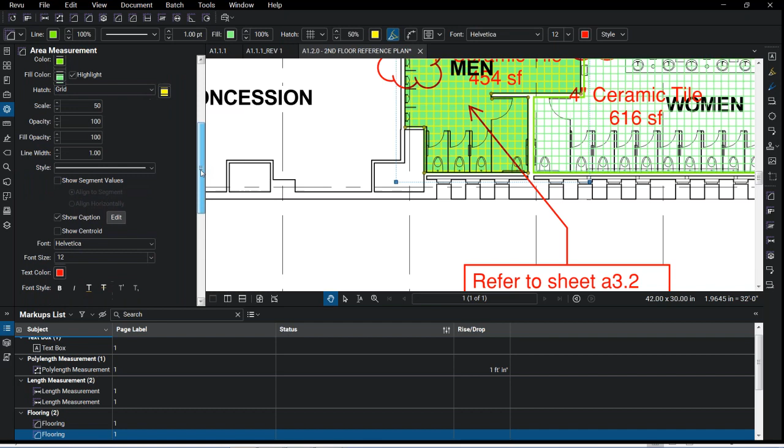And we can change my text here. Let me see. I know there's a mask. Yeah, there was a masking here allowing me to adjust that. I don't know where that one is. Should be. All right, so maybe not. But what we can do is change that. Maybe get rid of just this lighter. So no, it looks like it won't actually put a text box behind there. Pretty sure we can figure out how. I'll follow up after the webinar. It can be done. It'll just take me a few minutes to figure that one out.

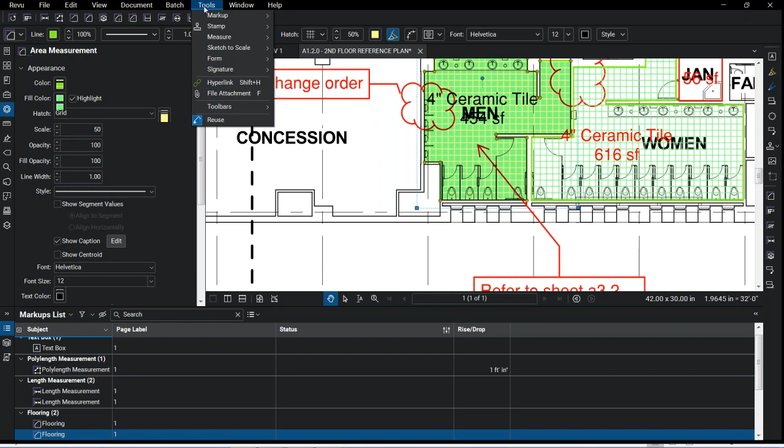All right, so the volume tool is up next. Were there other questions about hatch? I'm gonna answer both of them by text, in the interest of time. Okay, cool. With the volume tool here, this is kind of trippy, right? Because you're like, how do I get a volume off of a 2D PDF? Well, I'm going to show you. So we go around here, we drag it around. Oh, you know what? I'm going to double click to end that one out.

Start that one again. Measure, volume, okay. Oh. All right, stop jumping around on me there. All right. Well, David's getting ready to set that up.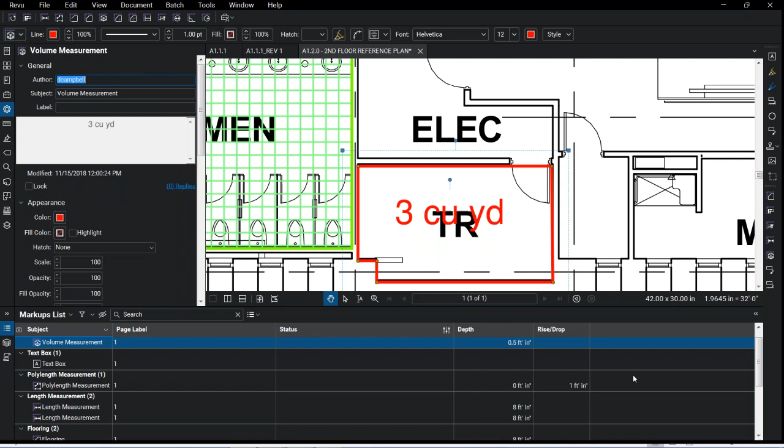Again, I can utilize my hatch with this. Maybe put a concrete hatch pattern on there. Change my subject to become something of concrete, and I could say this is my 2500 PSI, 3500 PSI, whatever you want to call these labels, to be able to search and filter down for specific information within your markups list, and then again with estimating and all that kind of stuff. All right, cool. I'm going to close out of this one. I'm not going to save it. I'm going to come back here, close those other tabs, and get out of there.

So I believe this is the time everybody's been waiting for, right? Studio projects and sessions. I'm going to go through a demo of each one of these and go through their features, how to adjust permissions, all that kind of stuff. I'll start off with a studio session. A studio session is online real-time collaboration, okay? Now, a side note, not every user has to be on at the same time to mark this document up. You can take it offline, place your markups, and at any point in time go back online, and your markups will sync to the cloud copy or that hosted copy on your session.

So I'm going to get into this. On a quick note, though, your ID over here, this 810-732-067, this is the studio ID number. Every project and session are assigned a unique studio ID number. So you can go to join, and then type in that specific studio ID number, all right? So that is one way of joining those sessions or projects. The other one is getting an emailed invitation.

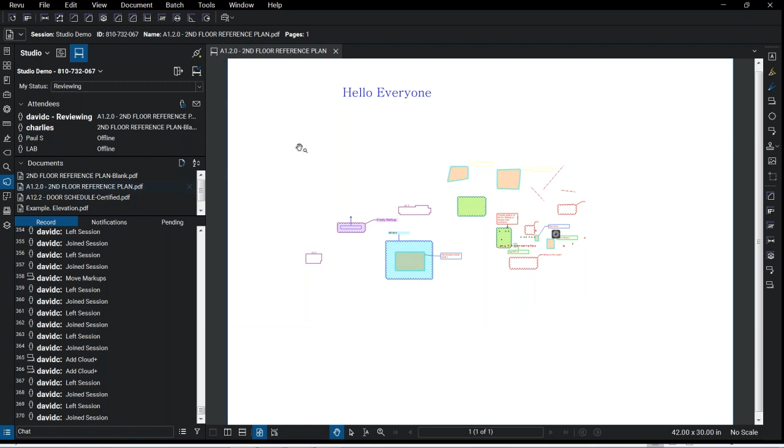It goes bye-bye, all right? It will print you out a nice little report, though, at the end of it, and I will show you this as well. So we're going to have a full list of all of our attendees here. Okay, so you'll see a couple of these guys are offline, and a list of all of our documents. So if I get into my A1.2.0 second floor reference plan here, it's going to go ahead and post up all of the markups that were made on this document.

Now, my markups list is also tracking all of this information, but I do have a nice little record here that's tracking all of the activity in my session as far as who comes in, what time they came in, what time they left, what markups they placed. Also has a little handy dandy chat box down here, right? So I have my chat box here. I can place hello everyone in there, and there it is, right?

But I know if I go to print off this record or this report here, maybe I don't want everybody to see that interoffice chat, that interoffice communication I got going on there. So what I can do is choose to filter this down further and say, you know what? I don't want the chat to go ahead on my final report. They don't need to see that. Okay, so I can turn those on and turn those off.

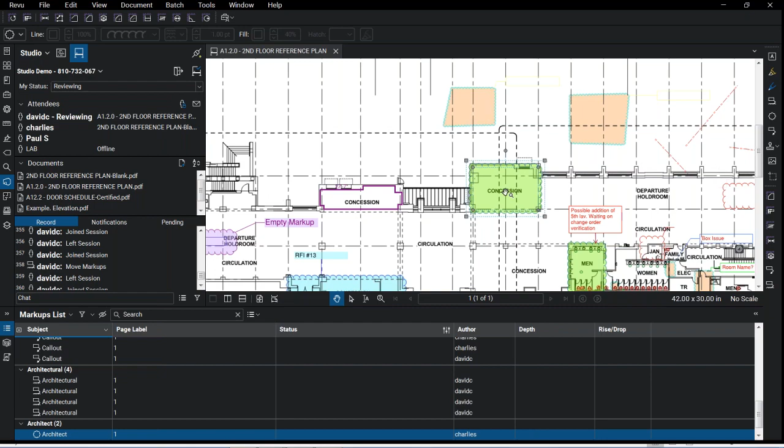One of the great things about sessions, guys, is that you're collaborating in real time, right? But you'll notice if I select maybe this markup here, I can adjust this markup. That's because this markup is placed by me. If I go to adjust this markup, I'll bring up my author column here. All right, I cannot adjust this markup because it is placed by someone else, okay? So you have full accountability in this session. Once somebody makes that markup, you, the person who made it, will be able to adjust it. Anyone else? No, it's on there.

But what's awesome, here we go. We got some activity going. Yeah, see that? Look at that. So all of this is, like I said, kind of real-time collaboration, right? So this is all happening right now, and it's fantastic. We can have up to 500 people working with us in one session, up to 100 documents of up to 100 megabytes apiece. But the drawback here, it's 2D and 3D PDFs only, okay? So we're going to be looking at PDFs with our session here.

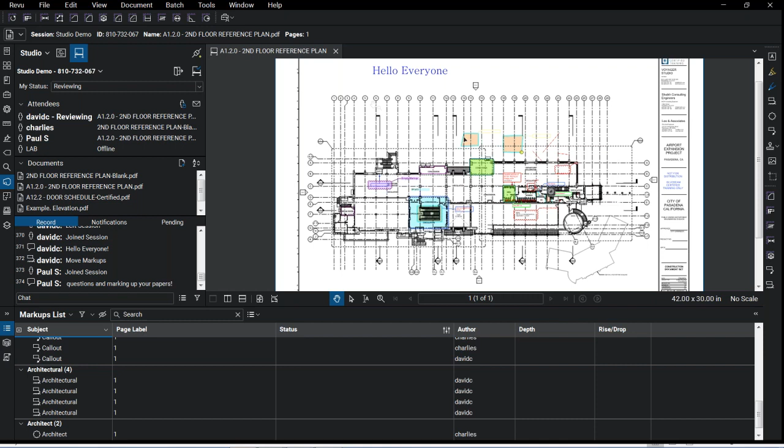Now, I'm going to go ahead and print off this report here real quick, and I'm going to show you guys what this is going to look like. And I'm just going to go with record summary for time's sake. So actually, we got some activity going on over there, and he's placing markups. All right, I'll place this here, and there's my studio report, right? A nice little printout of all the activity that has been happening within my session.

So get back into my session here, and kind of going back to what's going on, you can still, hello. And you see he just placed that. It's going to populate for us right there. Awesome, right? You can still filter through all of those different markups, pull all that information, everything like that you guys need to do. And if I get up in Studio here, nope, not that one. There we go, studio demo and settings, right?

This is where I can go ahead and start adjusting who my attendees are and what permissions I'm giving them. Now, you can allow them to save as, print, markup, alert, add documents, give them full control, which is going to change all of this to allow, okay? So it's pretty basic permissions here, but it's nice. And what we can do is actually adjust these either per attendee or based on a group. So I can add the typical users of the contractors I work with here in a group, and assign those permissions on a group basis there.

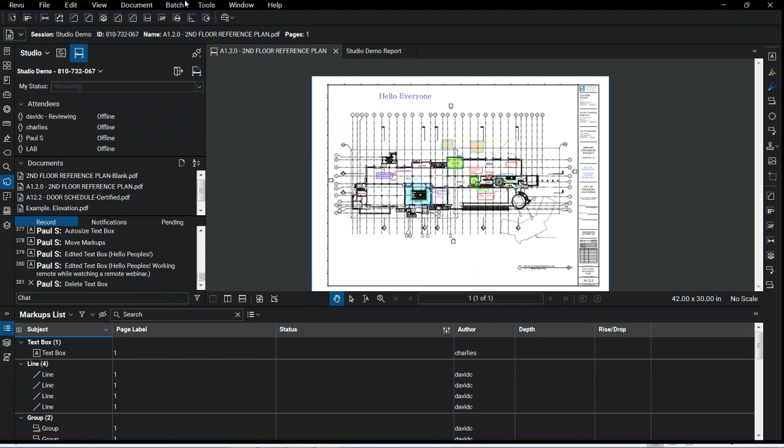I like it. I'm going to go ahead and take this offline for a second, right? I take this document offline, again, markup, bring that Cloud Plus over here. Just draw something over here. Cool. And then you're going to see that little cloud symbol down there.

As soon as I come back online, it'll take a second. There it is. Logs me joining back in, and my markup has been adjusted and added or synchronized to that cloud document. Right. So it's on point. So let's go ahead, and I'm going to go ahead and leave this session, right? I'm going to leave out of this session real quick and step away.

All right, I'm going to get away from the studio demo report and go into a project. So I'm going to just be straight here. I personally have seen a lot of workflows from sessions and projects start in projects. Why? So we'll take a look at the layout here. What you'll notice in a project is that you can break it down per folder, right? So you have a complete project folder structure here.

In a project, this is going to be quite different from your typical session type thing. What we're going to see is that individuals would check in and check out documents, okay? So the folder structure here, they can check in, check out documents. You can host any amount of documentation. There is no file size limit and no file type limit.

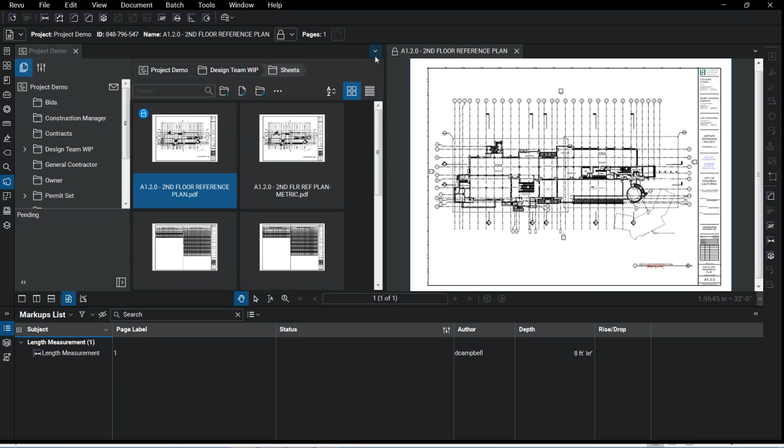Well, one of the things that we'll see is, let me get into this design team folder here, get into my sheets, and maybe my reference plan here. This is kind of new to 18 as well. You're going to see this new layout, as well as the ability to open in a split view. Okay, so I can still keep an eye on what's going on in my project while in this document.

Now, if I go to markup on this document, everything is grayed out to me. Why? Right here. I need to go ahead and check out this document, right? Once I check this document out, then I can go ahead, there we go, tools, markup, and there they are, right? Now, this leads itself to a great talking point.

Once we check that document out, and I go to check that back in, it creates what's called a revision, right? So it's keeping a revision for me, and I can track that revision history. See how many times anything has changed in this document and keep this updated. Not only can I do that, I can go ahead and open or restore a previous revision, right? So fantastic. I can keep an eye on what's going on.

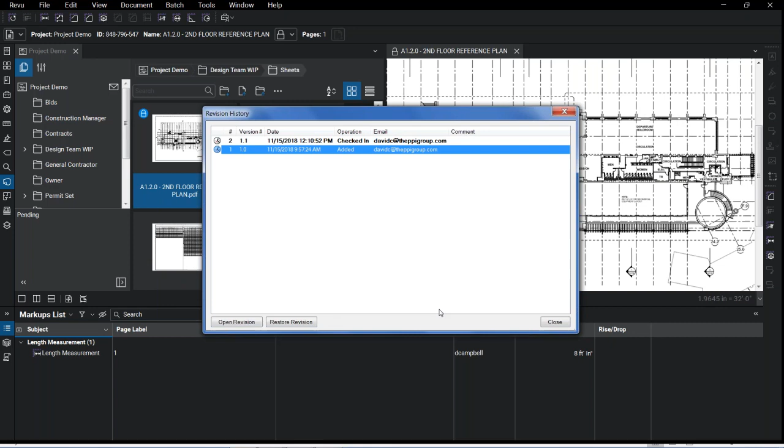See, you know what? Charlie got in here and placed way too many markups. Charlie, we're not trying to do all that. I'm going to go ahead and restore a previous revision. I'm going to roll that back, okay? So you have that full control.

But here we go. When I right click on these documents here, check that out. Add to new session, right? Add to new session. Projects gives you the ability to host all of your project documentation. Host it all right here. And then when you're ready, when you need to collaborate with 4, 5, 6, or 500 people, okay, you can take your documentation from this project into a session.

Once you do that, you would be able to update your project documentation from that session. Okay, so we can keep updating our project copies. That way everybody else involved in the project can keep an eye on what's happening. They know what's going on as far as what changes have been made, any comments placed, all that kind of stuff. Now, one big thing here, and this is huge for a project, right?

What we'll see is that, of course, you have your general permissions, which again, we can place by attendees or group. Send invitations, manage user access, manage permissions, that's a big one. Sending PDFs to sessions, revoking that checkout.

So if somebody's got that document for like 2 weeks and they have not updated your project copy, they're not communicating with you, go ahead and revoke that checkout, bring that document back in, and let somebody else go ahead and mark up on it. Then we have the share file links in full control. But let's get deeper than that, right?

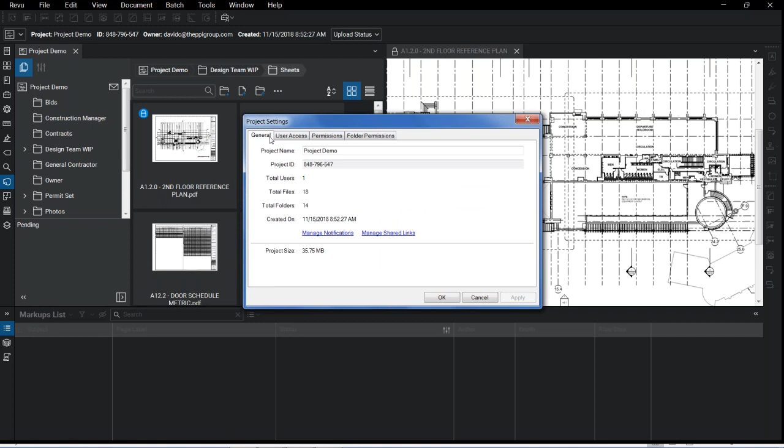Then you can also take those documents into the session. One big one I did want to talk to you guys about is restrict users here. If you have this option checked in a project or a session, whoever goes to access or join has to receive an emailed invitation first. They have to receive that emailed invitation in order to access it. So if they try to type in the studio ID number, unless they click into that email notification first, they won't get into it. If you uncheck this, it allows anyone to type in that ID number and join with your project or session.

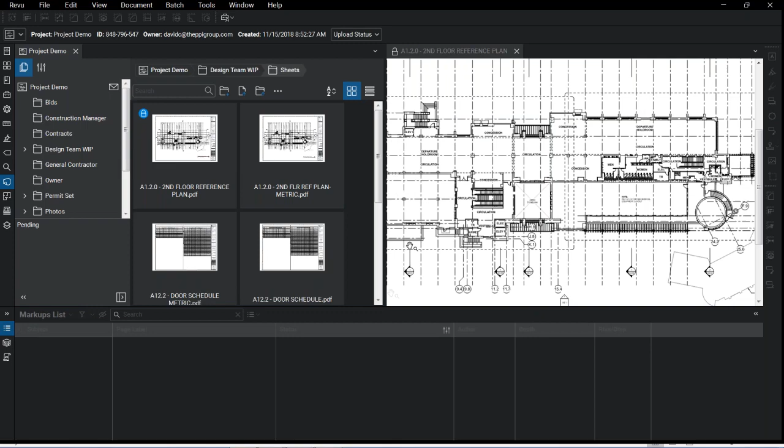All right, so does anybody have any questions for me as far as the project sessions, any workflow, or any features that maybe I didn't cover? I know we just got a couple minutes and we're running over a little bit already, but anybody have any questions for me out there?

In the meantime, while people are getting those last minute questions in, we are going to try and wrap things up here. But I want to put up, if we could, real quick. Looks like there's nothing coming in.

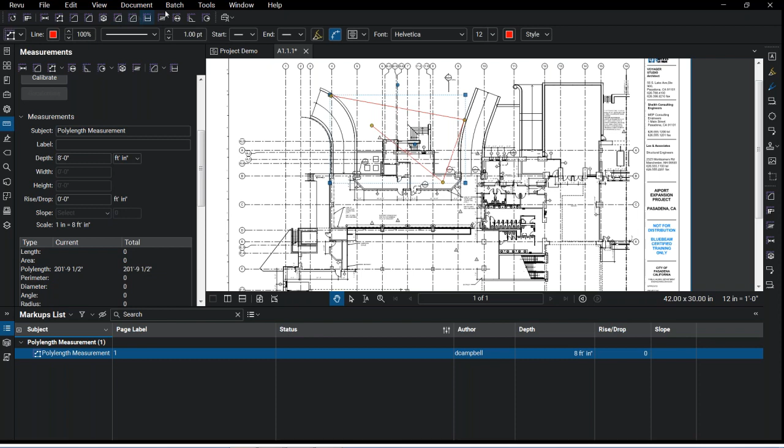I'm wondering which one. Yeah, you know what? I'm going to say yes, you can adjust what you're seeing as far as your slope for the precision or the units here. I'd have to dive into this one a little bit more to see, because your poly length works explicitly with that rise and drop here. It's not really wanting to give me an option to work with slope, so I don't think that one's going to associate. The slope there is going to be that rise and drop, and we can adjust that as far as what we're seeing is feet inch, or if you want to see your different units, essentially, as far as what we're reading inside of our, so you need to recalibrate and change the units. Okay, so maybe we'll take that offline.